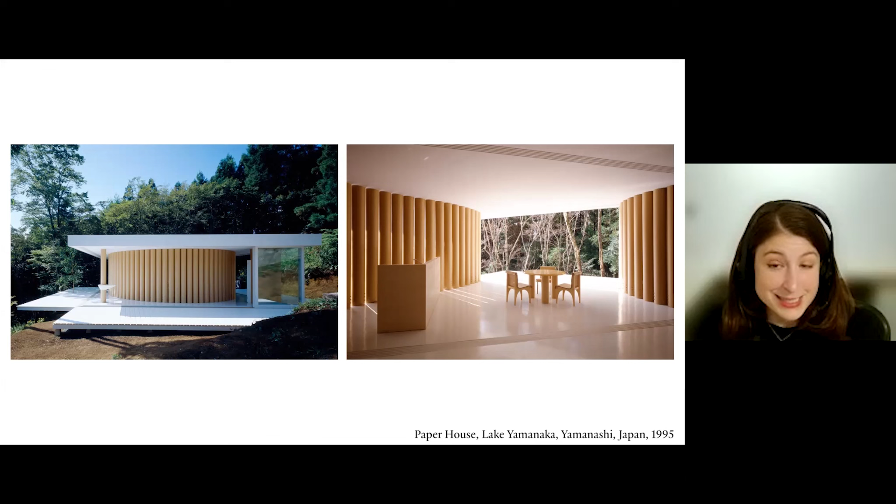A decade later, in 1995, Shigeru designed his weekend home, which is known as the Paper House. This is the first building in the world that was permitted to use paper tubes as primary structure. Shigeru often jokes with the office that he hasn't actually seen it since it was built because he's just too busy.

This might be more of the paper tube work that this audience is familiar with. Shigeru is very well known for his humanitarian work. So he uses paper tube structures to create disaster relief shelters around the world. These are 8 instances of the paper log house, which is adapted to the local climate, culture, and construction practices of each site.

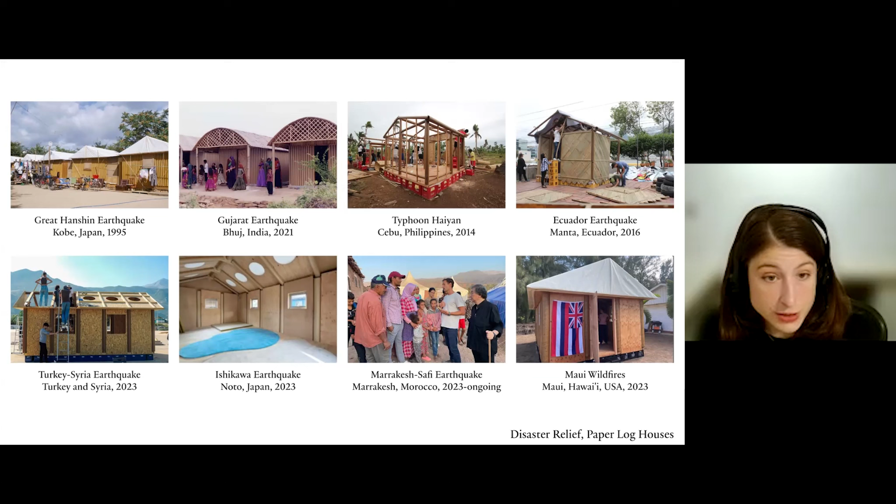Jumping ahead, this timeline displays Shigeru's progression from inventing with paper tubes at the outset of his career to the complex mass timber structures that we're familiar with today. But there isn't actually a distinct change from a paper era to a wood era because his timber innovation dates back to the 90s and continues in parallel with the paper works.

It's important to note that Shigeru's work is not limited to one material. We as an office are not timber purists, so we build with paper and wood, but also concrete and steel, often in combination. Regardless of the material, the breadth of our work demonstrates that structure and materiality are integral to the design process and not merely the means of executing a predetermined concept.

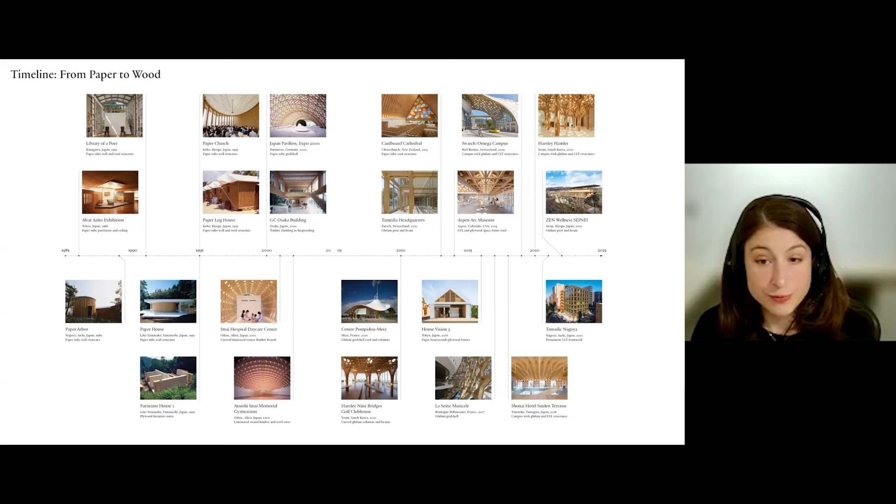Shigeru's work in paper is chronicled in the book on the left, Paper in Architecture, which was published in 2009. And in 2022, we published the compendium to this book, Timber in Architecture. This new book was created both to show the breadth of Shigeru's work in wood, but also to serve as a primer on how to design with wood.

Much like a building, a book is not a solitary endeavor. So I'd like to pause and acknowledge the global and interdisciplinary effort it took to make this book. We had contributions from across our Tokyo, New York, and Paris offices, as well as input from structural engineers, fabricators, and the editing and production team at Rizzoli. On behalf of myself and project editor Vittorio Lovato, I'd like to thank Shigeru Ban, Dean Maltz, and structural engineer Greg Kingsley for their immense input and guidance throughout this endeavor.

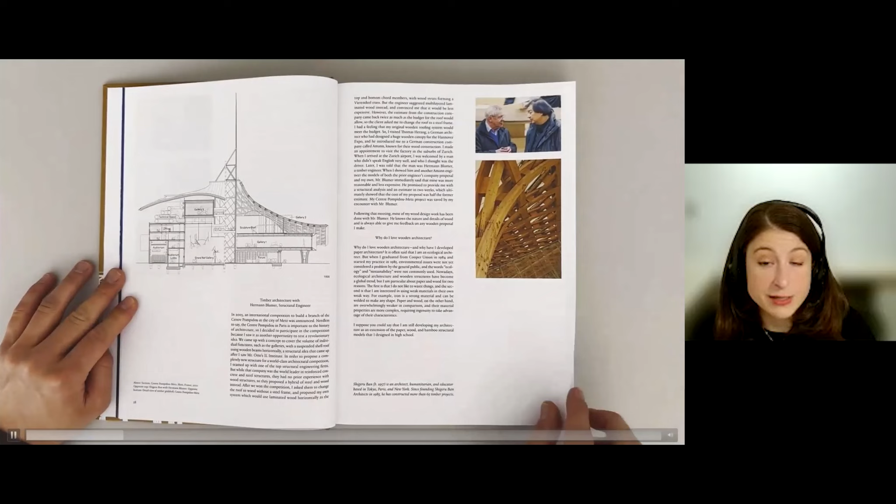So now let's take a look at the actual book. We begin with 3 guest essays to contextualize the importance of the subject of timber in architecture. There's a foreword by environmentalist and entrepreneur Paul Hawken, Shigeru's own essay, which is titled Why I Love Wooden Architecture, and Hermann Blumer's recounting of his career trajectory from carpenter to timber engineer.

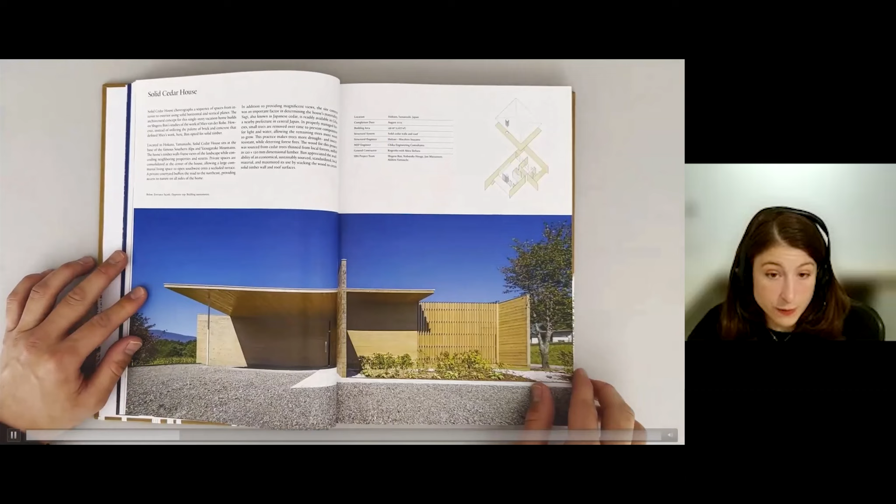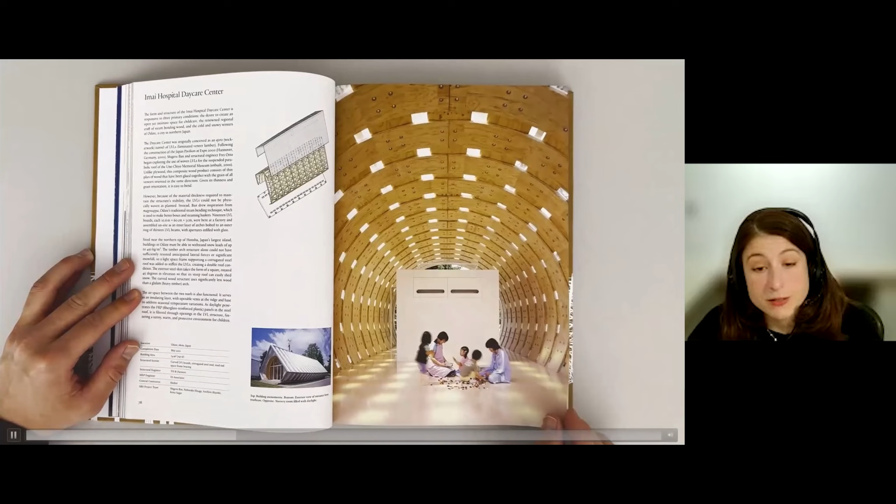The body of the book presents 45 works from concept through to the completion of construction, demonstrating the merits and challenges of working with wood. These projects range in scale, budget, and program, from prefabricated plywood houses to parametrically modeled glulam gridshells, showing the spectrum of what wood can do. Projects are arranged thematically rather than chronologically. So here you can see clusters by structural typology.

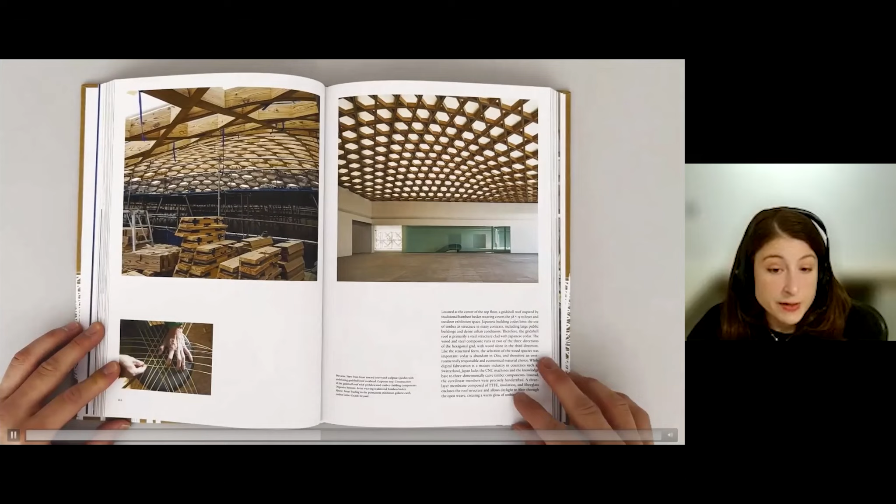Each project is illustrated through photographs, technical drawings, and documentation of the construction process. The subject of timber in architecture is inherently interdisciplinary, so throughout the book, you'll read about great collaborations among architects, engineers, fabricators, and builders.

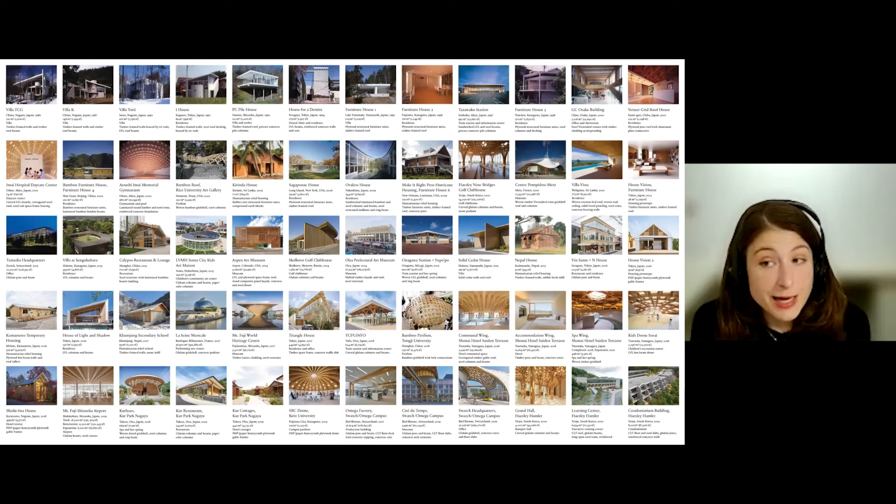The book concludes with an index of all of Shigeru Ban Architects' unbuilt, built, and in-progress timber projects. We have over 75 built timber projects around the world, from private houses to multi-building campuses. We'll be looking at just 10 of these tonight.

But first, we have to ask, why wood? This is a question that we've been asked nearly every time we've presented for the past decade, and it was the impetus for this book. Wood is a versatile natural material with diverse structural possibilities. It's sustainable and renewable and can often be locally sourced.

With offsite fabrication, timber construction sites are typically cleaner and safer, and construction schedules are often much shorter. You may be familiar with the term biophilia. Buildings with visible natural materials are noted for their positive psychological effects, promoting health, happiness, and even productivity.

Part of our tasks as architects is to continuously learn and educate. And so now more than ever, it's imperative that architects, builders, clients, and even the general public recognize how construction impacts the environment. Issues of waste, permanence, and material selection are crucial considerations in a holistically sustainable approach to design and construction. You've probably all heard the statistics. Buildings account for nearly 40% of the world's carbon emissions, with 11% due to construction alone.

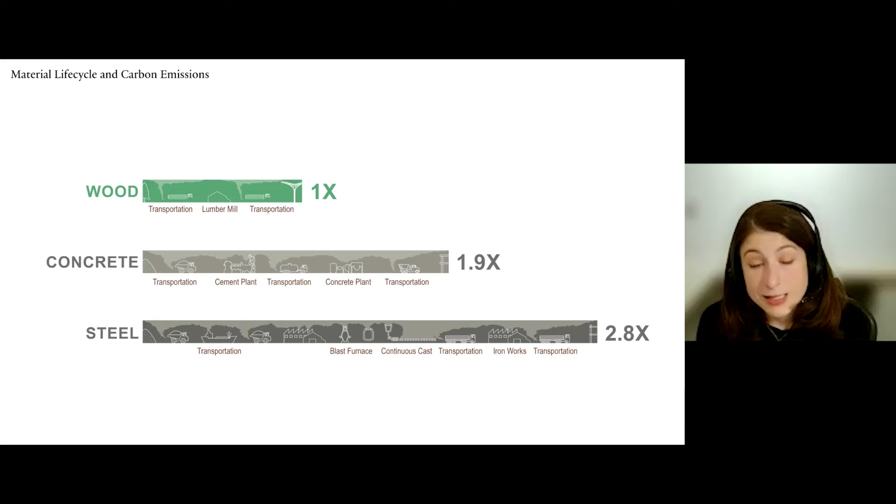But in terms of embodied carbon, wood far outperforms alternative structural materials such as steel and concrete. And this is a large reason why we advocate for timber. But it's reasonable to understand concerns. First, what about deforestation? Contrary to popular misconceptions, the use of sustainably sourced wood from small diameter trees promotes the health of forests and makes them more resilient and fire tolerant. Next, isn't it expensive? Many people think only about the unit cost of a material, but reductions in on-site labor and construction duration often yield considerable savings for timber projects.

Coincidentally, the oldest timber structure in the world is in Japan. This is the Horyuji Temple, which is more than 1,300 years old. It still stands today in part due to its strong and durable materials, robust structure, precise detailing and construction, and also because it's of great cultural significance. As Shigeru often notes, if a building is loved, it becomes permanent, and this concept transcends materiality. Buildings that are meaningful to their communities are cared for, and that's truly the most environmentally responsible approach to create architecture that endures for generations.

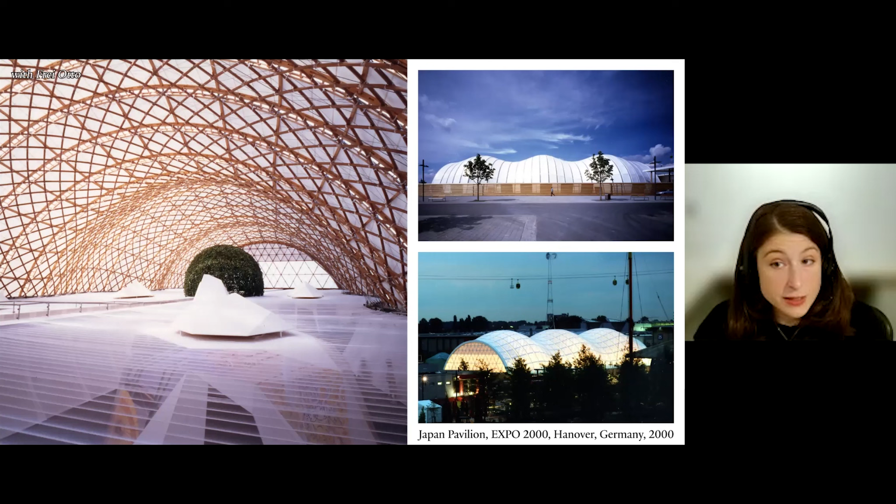To do this, we need to collaborate. From the outset, we engage a team of structural engineers, fabricators, and builders, seeing real-world constraints as opportunities for innovation. Shigeru has great respect for his collaborators, and his introductory essay in the book is dedicated to his close working relationship with these three renowned structural engineers. Gengo Matsui helped Shigeru's early paper tube concepts come to fruition, advancing beyond simple upright columns. With Frei Otto, Shigeru delved into form finding. So here you can see the influence of Otto's Mannheim multi-hall on Shigeru's paper tube Japan Pavilion in Hanover.

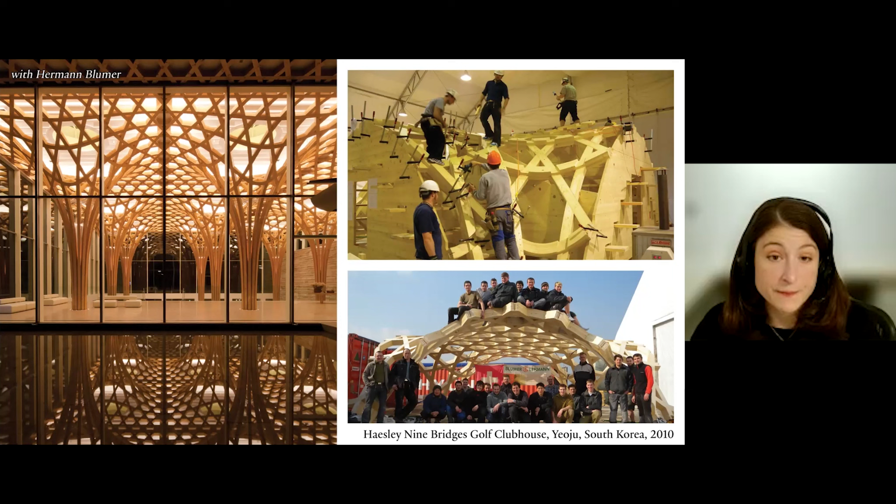And lastly, we have Hermann Blumer, who also wrote an essay for the book. He began his career as a carpenter before pursuing a PhD in structural engineering in 1969. His focus on wood was actually looked down on at the time, since his colleagues didn't think wood was a complex enough subject. But Hermann persisted, and he became a pioneer of digital fabrication. He later designed the first fully automated CNC machine. You can see the breadth of his understanding of structure, materiality, and craft here in the Nine Bridges Golf Clubhouse.

Next, we'll begin a deep dive into a selection of projects, beginning with the first project in our book, Furniture House 1. Sometimes the topic of local materials is less related to regional wood species and more a matter of what building materials are locally available. The first in an ongoing series, Furniture House 1 uses prefabricated plywood furniture units as the primary building structure. This residence is located on a remote wooded hillside, which posed construction challenges regarding site access.

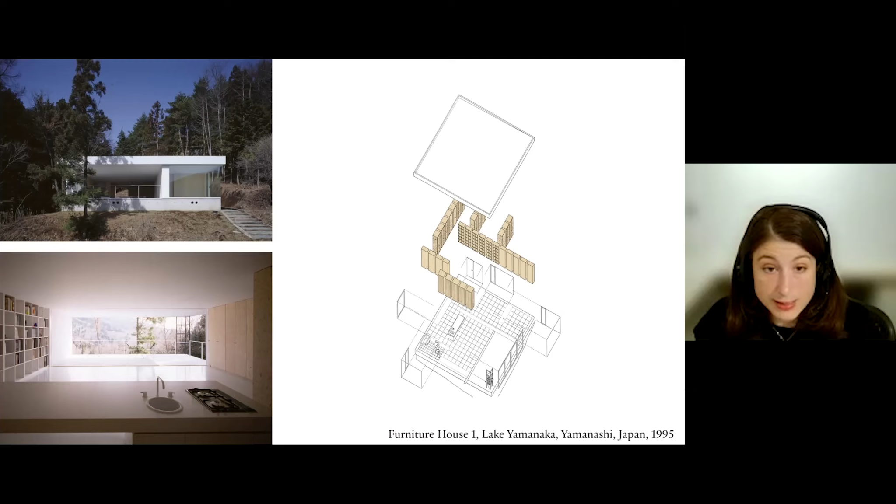Standardized furniture units allowed for off-site construction, which reduced construction time, material waste, and the need for on-site labor. This yielded both cost savings and a higher quality building. The 33 prefabricated furniture units included closets, cabinets, and bookshelves. Each weighs approximately 175 pounds and could easily be maneuvered into place by just 2 people.

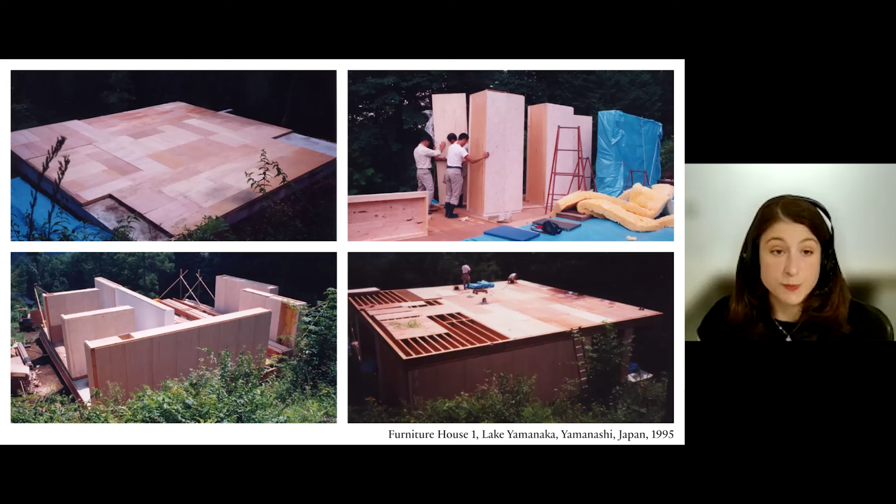The Bamboo Furniture House is the 4th house in this series. This one-story residence draws on traditional Chinese architecture, with rooms arranged around a central courtyard. Here again, Shigeru used furniture units, but as the name suggests, he selected a geographically and culturally appropriate material for their construction. Shigeru had found that local lumber options were limited near this mountainous site, but he was intrigued by plywood-like boards that he found that were made of laminated woven bamboo strips.

He thought that this could be manufactured as a building-grade material, so he began to pursue rigorous testing with assistance from a bamboo factory. His newly developed material, which he deemed laminated bamboo lumber, or LBL, was used throughout this home for both bamboo furniture units, furnishings, and finishes throughout. This project epitomizes how Shigeru explores new and creative ways to address design constraints with local, natural materials.

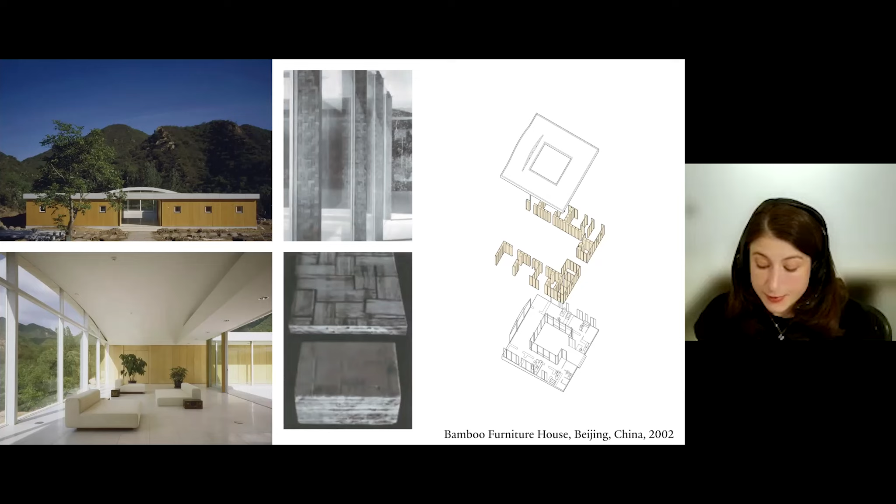Increasing in scale, let's discuss what we do when code prohibits mass timber structures. Ironically, Shigeru has found that Japan has some of the most restrictive building codes in the world. In most urban conditions there, it is not possible to build in mass timber. The misconception in this case is that mass timber buildings are not safe, but in actuality, building code has not caught up to the realities demonstrated by rigorous testing. In the US, we're lucky to see code changes quite regularly.

Shigeru grappled with this over 2 decades ago when he was commissioned to design a new office and showroom for a dental company. Since a timber structure was not allowed, he opted to work with steel for its strength and ability to span long distances. Steel requires a fireproofing layer, known as encapsulation, to prevent structural damage in case of fire. This is typically clad with a finish-grade material to improve its appearance.

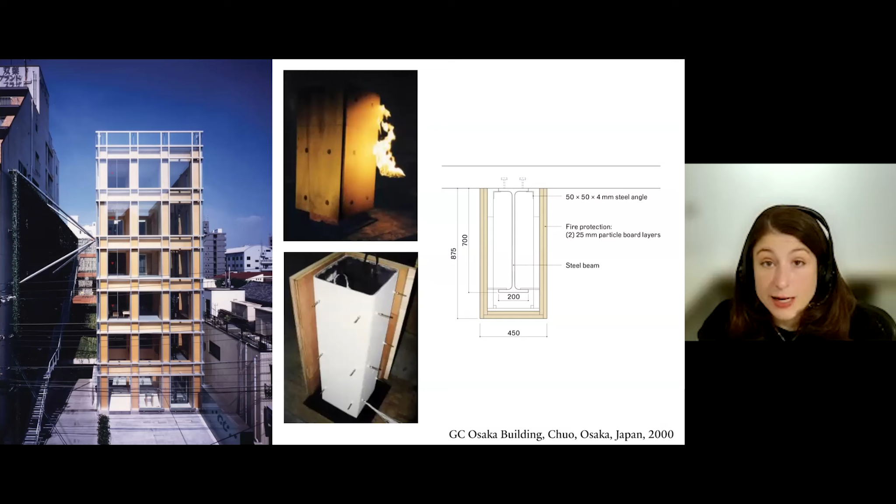Subverting the logic, Shigeru demonstrated to officials that wood could in fact be used to fireproof steel. Fire resistance tests demonstrated that 50 millimeters, or about 2 inches of wood, adequately addressed the building's 1-hour fire rating requirement. Therefore, 2 layers of particle board with a plywood finish were used to encapsulate the steel. So despite not being a timber structure, the building retains the warm aesthetic of wood.

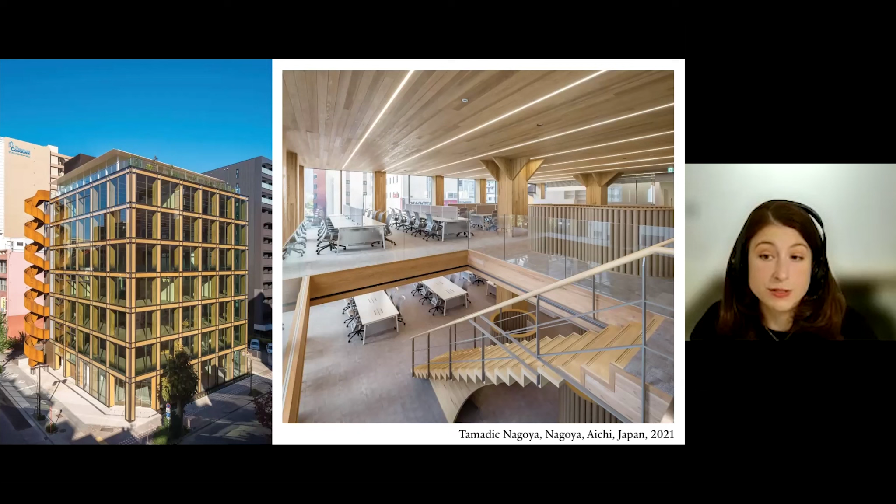Tamadic Nagoya is a more recent example. This aerospace and automotive engineering company wanted an innovative building that would take advantage of biophilia. And as I mentioned earlier, timber environments have been shown to improve employees' sense of health and well-being and even productivity. This 8-story building is also located in a Japanese city. So to satisfy the building code while retaining the warm aesthetic of wood, a hybrid approach was used here.

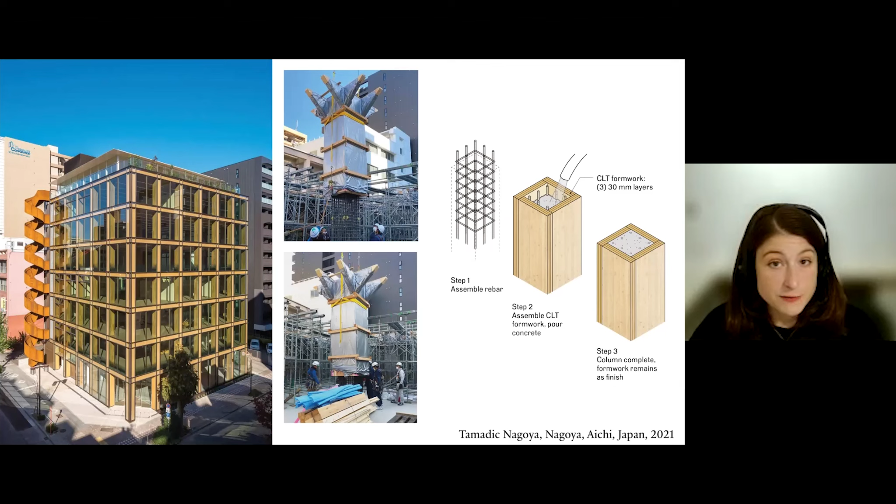Tamadic Nagoya employs CLT, which is cross-laminated timber, as the permanent formwork for the concrete floor slabs as well as the concrete column structure. On the right, you can see that a box was made of wood, filled with concrete, and then the wood was left in place. The use of permanent formwork has many benefits, most notably the biophilic benefits of wood, a shortened construction schedule, reduced carbon footprint by eliminating sacrificial formwork, and lastly, not needing additional finish layers because the wood serves as a finish.

Increasing in scale, let's talk about mass timber itself. So in contrast to solid wood, mass timber is an engineered wood product that's composed of lumber from small diameter trees that's bound together by adhesives, nails, or dowels to create larger structural members. This has two primary advantages. First, it doesn't require the use of old growth trees. And second, mass timber is inherently stronger than comparably sized wood. Because it's a composite, mass timber is a standardized product with predictable strength characteristics.

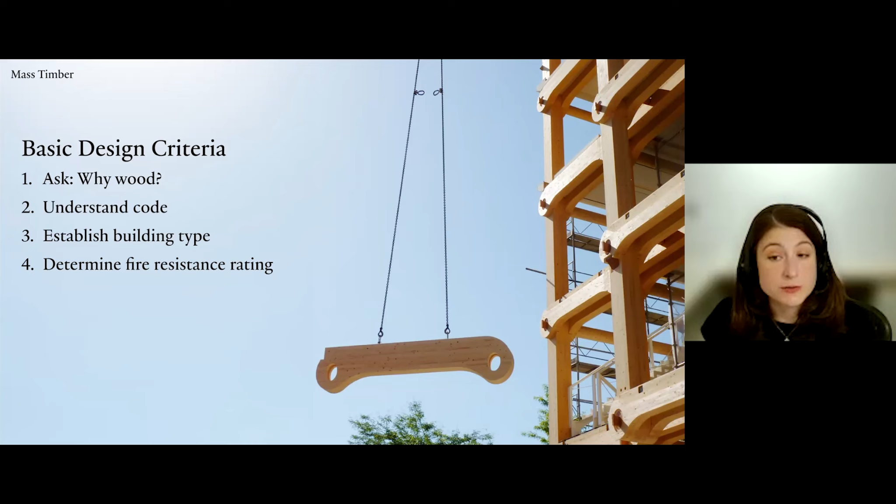So first we have to stop and ask, why wood? Is it even the right material for the job? Oftentimes, a hybrid solution is the best approach. Next, we review the code to understand what you can do in a given jurisdiction and establish the building type and fire rating. From here, we can establish the structural grid, considering spans and member sizing in relation to vibration and deflection. Once the grid is established, we consider the MEP strategy. Do building systems bypass the structure or pass right through it? And lastly, how do we optimize the volume of wood to both minimize material waste and erection time?

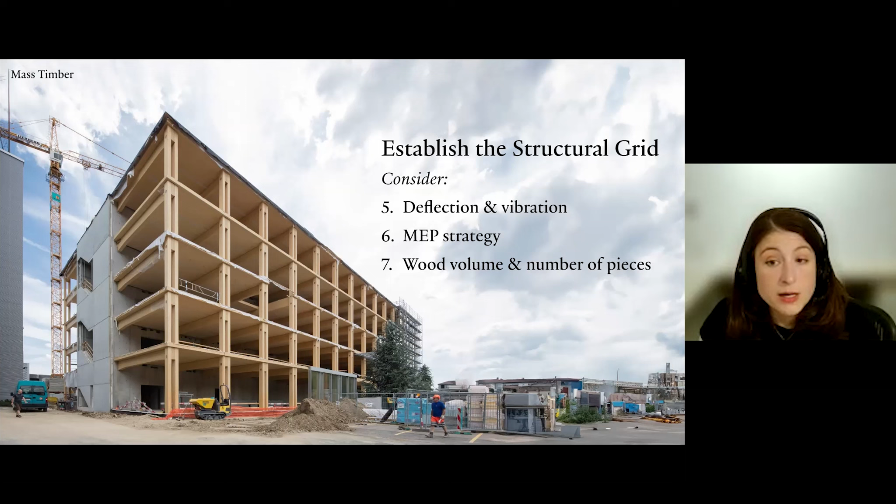Now we can think ahead to constructability. Ideally, you want to meet with a potential mass timber supplier and fabricator at the outset of your project to allow them to influence the design process. So you can stop and think, what species of wood will you use? Is it native? In the US, in the Pacific Northwest, you might be thinking of a spruce pine fir, but in the South, perhaps southern yellow pine.

You'll consider also the manufacturers' and fabricators' geographic proximity to each other, as well as your site. As you consider connections and tolerances, think about your partner's fabrication equipment and how the design will come together. With all of this in mind, you can allow your partner's capabilities and limitations to inform the design process. You simply can't fabricate projects in the same way in New York as Switzerland, for example, but you could leverage these differences to find opportunities.

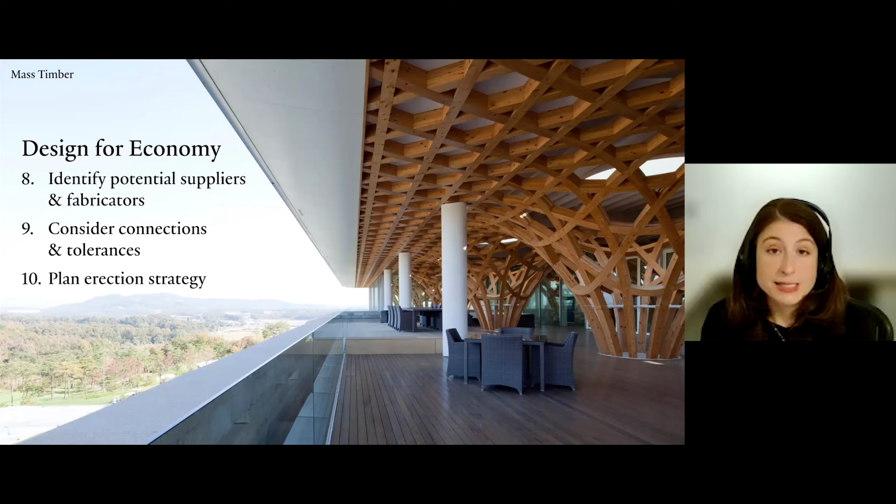Lastly, begin to outline the erection strategy. This is something that we often do in schematic design at Shigeru Ban Architects. So from how many truckloads it takes to how you'll stage the site, this impacts both cost and schedule. We'll spend the remainder of the presentation looking at three structural typologies. First, post and beam structures, then space frames, and lastly, grid shells.

Switzerland is a global leader in timber construction. The Tamedia headquarters is our office's first building in that country, and also the home of our friend Hermann Blumer, who is the structural engineer for this project. Tamedia is the largest media company in Switzerland, and they've occupied the same riverfront site in Zurich since 1902.

With this new project, the client had three primary goals. First, to create a workplace that feels like a living room. Next, to make the building feel transparent, both literally and metaphorically as a media company. And lastly, to maintain a reasonable budget. In response, Shigeru designed a timber post and beam structure wrapped in a glass curtain wall.

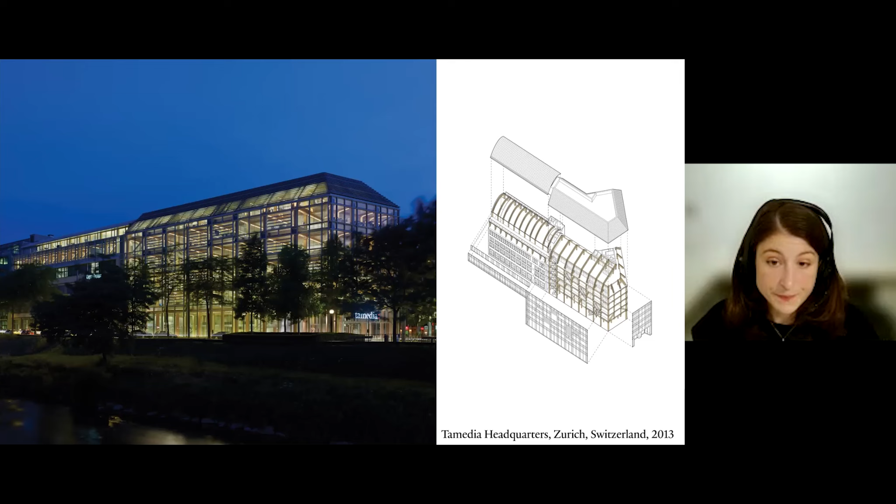Switzerland has high energy performance requirements, so sustainability was a key factor. For example, there's an occupiable double facade, which you can see in the image on the right, and this acts as a thermal buffer while allowing for natural ventilation. Here you can see the retractable glass shutter is raised, creating a pleasant indoor-outdoor balcony.

The robust columns and beams arrived on site like a kit of parts. Remarkably, each column was delivered as a single continuous piece, measuring 70 feet in length and weighing 2.5 tons each. This significantly reduced the construction time, which was a major advantage on a hectic urban site.

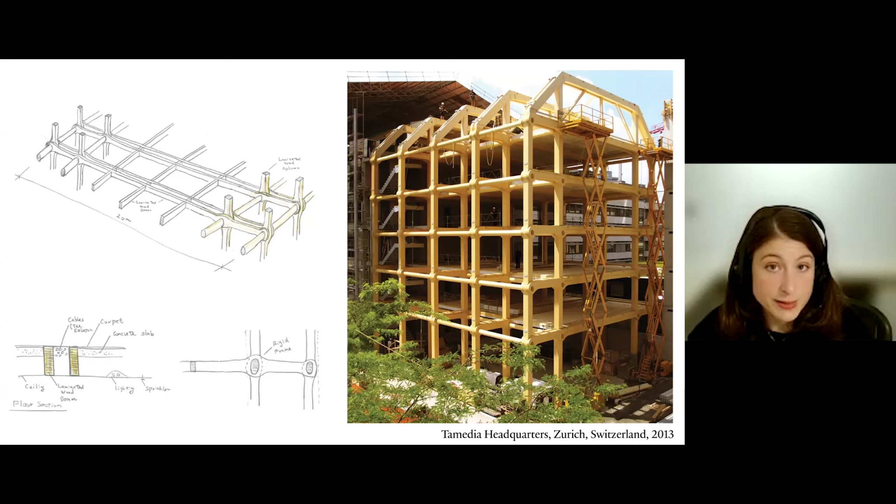The glulam columns and beams interlock at innovative joints, which are secured by an elliptical dowel without any metal connections. The form is both functional and elegant. The elliptical shape prevents rotation within the aperture. Hermann Blumer identified that the stresses were too large for spruce beams alone. Spruce is a softwood.

So Hermann suggested the inclusion of concealed reinforcement plates made of beech, which is a hardwood. In the diagram and construction photo, you can see that the beech is the darker material. The design and engineering of this joint is one of many great examples of the collaboration between Shigeru and Hermann.

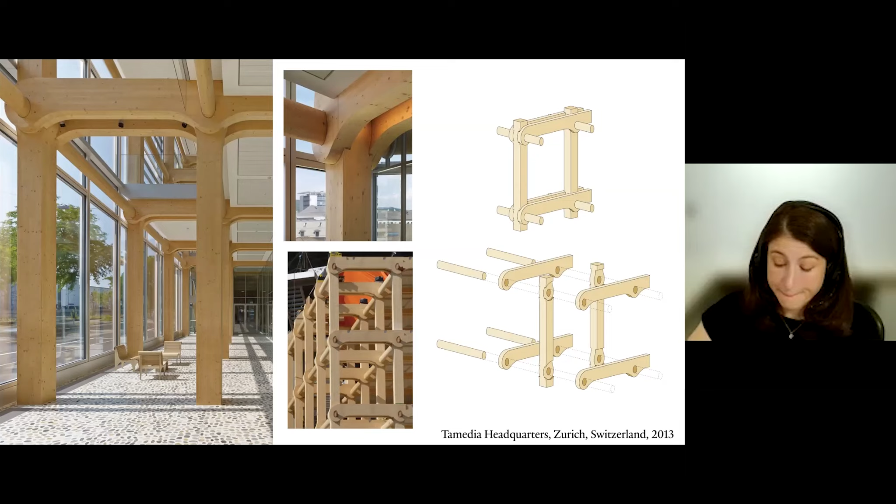Now we'll look at space frames, which are akin to 3D trusses. This is the Aspen Art Museum, which recently celebrated its 10th anniversary. The Aspen Art Museum was designed to be a unique yet contextual building, so its woven wood and paper composite facade is evocative of the color and rhythm of Aspen's historic brick buildings. The porous screen facilitates views into the museum as well as out towards the mountains.

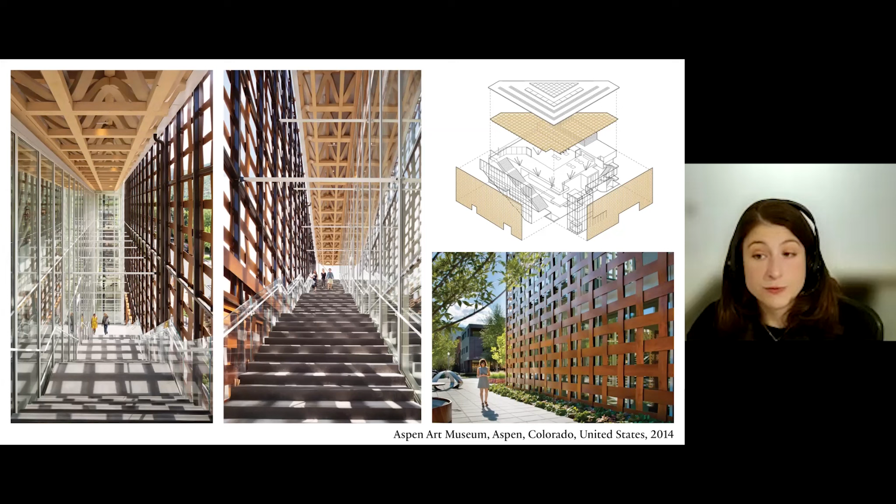Here you can see two views of the Grand Stair, which is an indoor-outdoor interstitial space behind the woven screen. Similar to the experience of skiing, the museum was designed to be circulated from the top down. Visitors first ascend via the Grand Stair or a glass elevator, and then arrive at the rooftop plaza before descending to the galleries below.

Shigeru believes that the natural context is as beautiful as the art, so it was important to highlight the stunning views of nature with the only free public rooftop in Aspen. The timber space frame structure extends from the outdoor rooftop plaza to an indoor cafe.

Below, the building interior is arranged according to what we call the thermos principle. Climate-sensitive galleries are concentrated at the heart of the building and are surrounded by less climate-sensitive spaces such as lobbies, hallways, elevators, and offices. This minimizes the temperature and humidity fluctuations in the galleries and allows the perimeter zones to take advantage of visual and physical connections to the outdoors.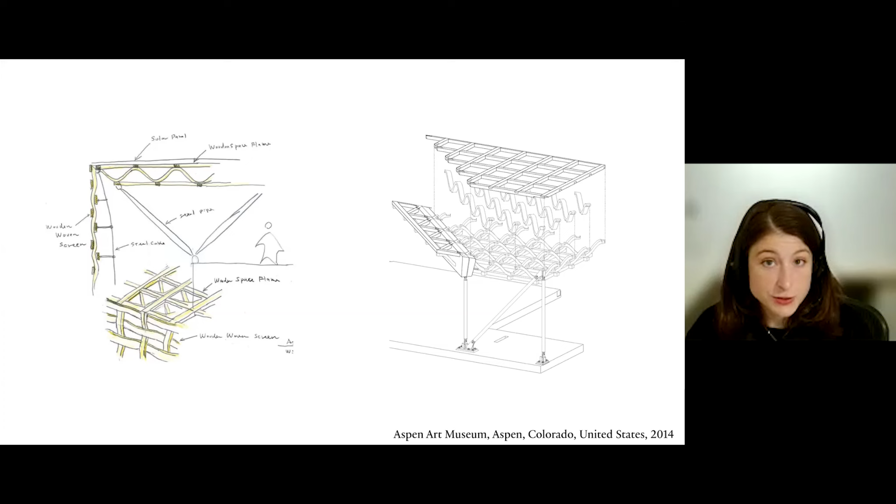For those familiar with space frames, you may notice that the roof structure is not a typical space frame. The webs are curved, which allows for sufficient wood-to-wood contact so that the webs can be connected directly to the chords with just diagonally oriented wood screws. As a result, there are no exposed metal connections. The structure was developed in conjunction with Hermann Blumer of Création Holz, Greg Kingsley of KL&A, and fabricator-erector Spearhead.

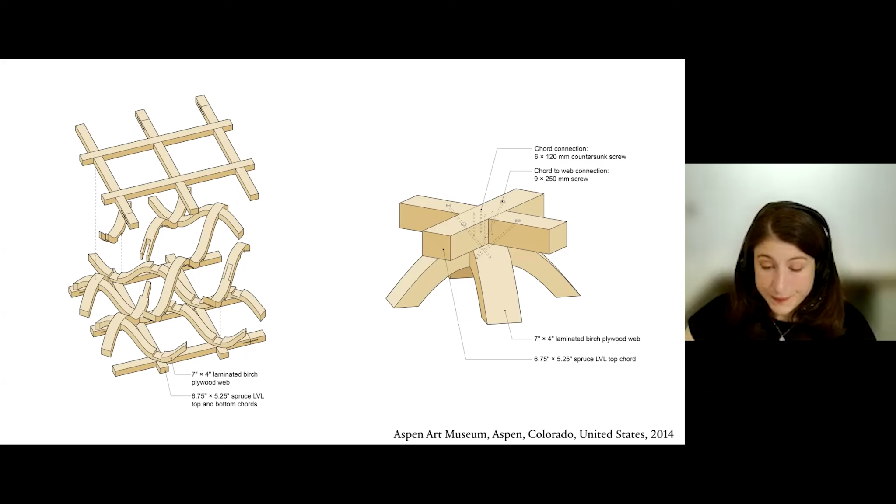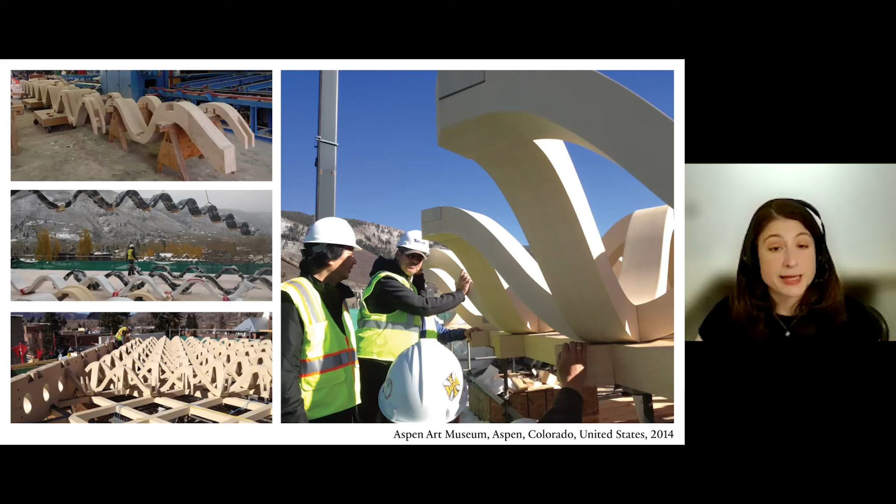Here in the upper left, you can see the 2D webs in Spearhead's shop. The timber components were fabricated and shipped to the site in the longest possible transportable lengths, which ultimately minimized on-site labor and construction duration.

Now moving on to gridshells. The Centre Pompidou Metz is perhaps Shigeru's most iconic building and one of the most well-known mass timber structures in the world. And though it's hard for us to imagine today, the client initially suggested switching to a steel structure. In 2003, the Centre Pompidou hosted a competition to design a new museum outside of Paris. The intent was to show more of their 120,000 works from their collections, as well as larger works that wouldn't fit in the Centre Pompidou's 18-foot ceilings. Given the architectural significance of the original museum, Shigeru saw the opportunity to build an unprecedented structure.

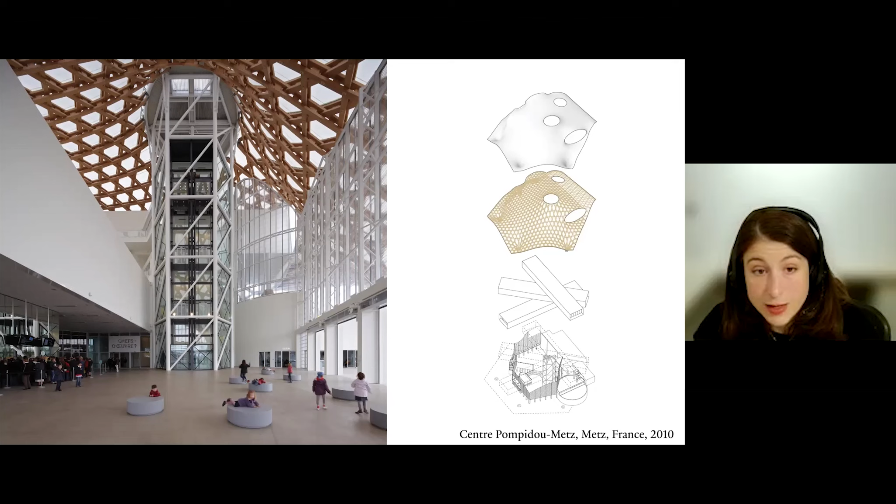The museum was designed as an open pavilion in a park. Unlike its peer institutions, the Centre Pompidou Metz is not a walled-off institution. Here you can see the 16-foot tall glass shutters retract to connect the building to the surrounding landscape and park. The building consists of a timber grid shell suspended from a 250-foot tall steel core tower. Despite its sculptural image, the roof defines a simple hexagon in plan, which is symbolic of the shape of France. 3 gallery tubes below are oriented towards local landmarks.

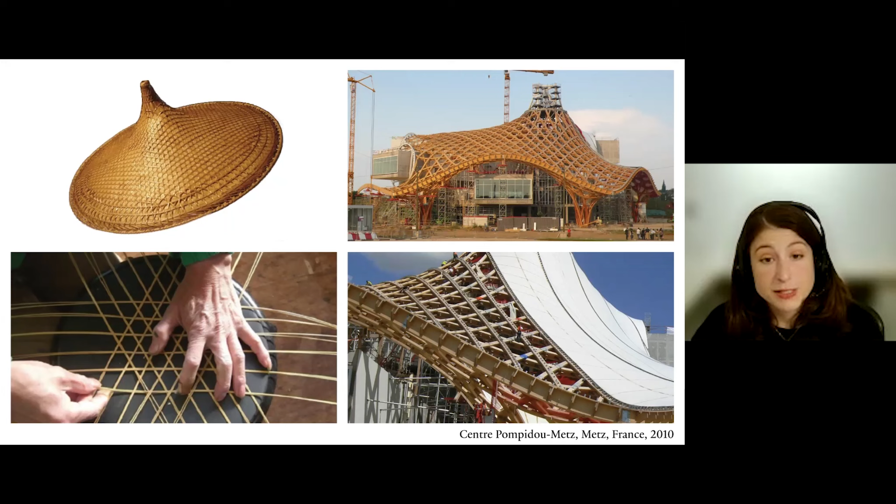So here in the upper right, you can see one of the gallery tubes, which is 300 feet long, is oriented towards the 16th century Gothic Cathedral of Metz. For the iconic roof, Shigeru drew inspiration from 2 seemingly unrelated sources. The first, cable net roofs designed by Frei Otto, which have a separate cable structure and wood enclosure. And the second, the self-supported woven structure of traditional Chinese hats, which made Shigeru question the necessity of cable net structures.

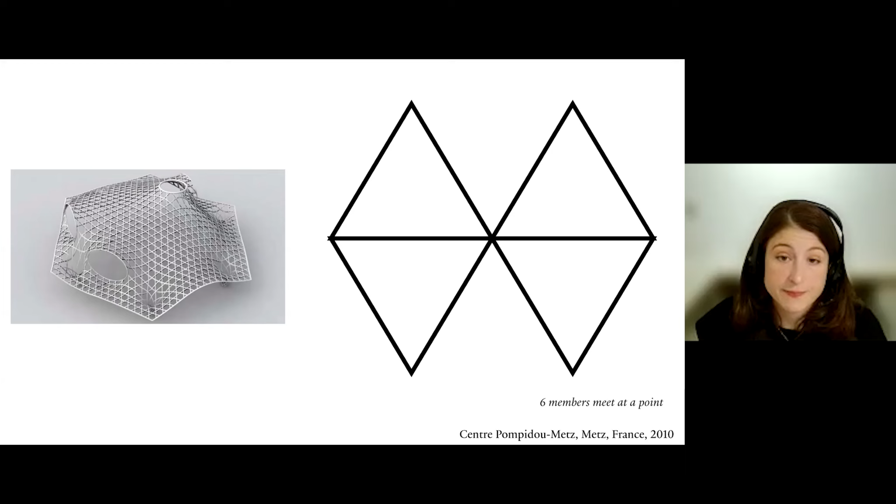In a typical triangulated joint, you'd have 6 members intersecting at a point. This yields a very complex and expensive joint. But here instead, you can see the influence of the woven Chinese hat. By offsetting the grid, only 4 members meet at a single point. This is the ingenuity of Metz.

The story of this building's structural resolution is really quite fantastic. After the initial team of engineers proposed a hybrid structure followed by a solid wood structure that was twice the roof's budget, the client asked Shigeru to change the roof to steel. But Shigeru wasn't deterred, so he went to Germany to consult timber engineers and builders. At the airport, he was greeted by a Swiss man who he thought was a taxi driver, but it was in fact Hermann Blumer.

The 2 sides of this story are beautifully recounted in the 2 introductory essays of the book. Shigeru described his conundrum, and Hermann cheerfully responded that he would have a solution and a cost estimate within 2 weeks. Truthfully, he had no idea. Then, and every time since, when Shigeru gives him a complex problem, Hermann goes off to the Swiss mountains to think and always comes up with a brilliant solution.

Independently, Shigeru and Hermann each realized that they should not only simplify the grid in 2 dimensions, they also had to offset the depth of converging members so that they would bypass one another at nodes rather than intersecting. They could then be connected by a simple pin. In this configuration, each beam is a simple Vierendeel truss. Similar to Tamedia, the beams are made of spruce, a softwood, and connections are made of beech, a hardwood, which takes on the high stresses of the joint.

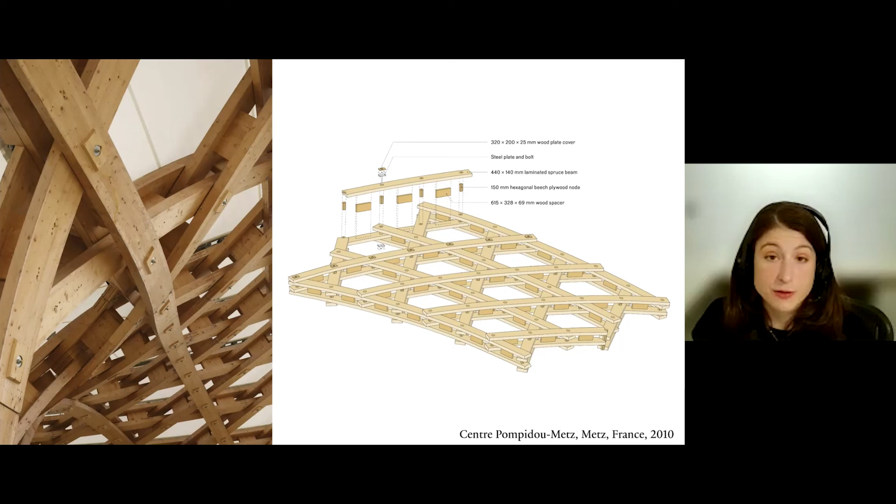The buildings share a design language reflecting the unified brands of Swatch and Omega, while expressing each building's individuality through contrasting structural forms. We'll take a quick look at the 2 rectilinear buildings, but focus on the grid shell. The Omega factory was built first. The Omega brand is known as the timekeeper for NASA as well as the Olympics, so it was only fitting to have a clean rectilinear form that reflects exacting Swiss standards.

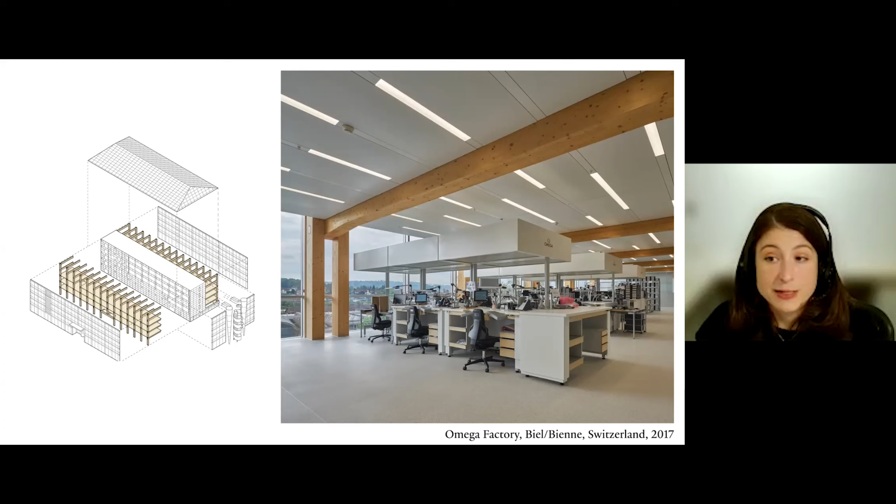The building is a post and beam structure with a rigid concrete core, flanked by timber-framed watchmaking workshops. Working conditions were a primary factor in the building's design. Most notably, literal cleanliness is highly important here. The Omega factory is the first building in the world to achieve clean room standards. This certification is important for the sake of craftsmanship as well as employee health. The workspace must be evenly lit and dust-free with minimal vibrations. Since mass timber is known to vibrate, a concrete topping slab was added to increase the weight of the CLT structure.

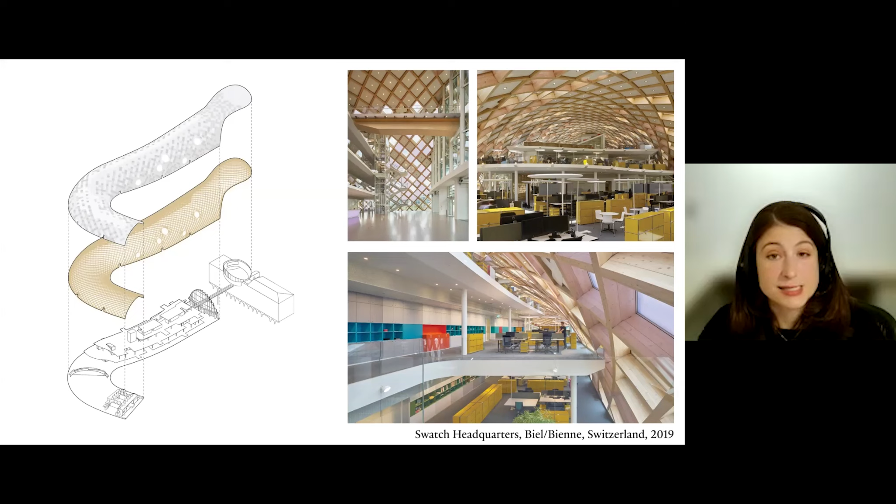In contrast to the maturity of Omega, the Swatch brand is playful, innovative, and provocative. Though the serpentine form and facade design appear unrestrained, each is responsive to a practical design constraint, ranging from code and zoning setbacks to material properties and building services. The structural grid shell covers 4 office floors, connected via 3 concrete cores. The timber structure is composed of a 7-foot grid of interlocking timber beams that seamlessly transition from wall to roof structure, and the office space below is open and flexible, fostering collaboration.

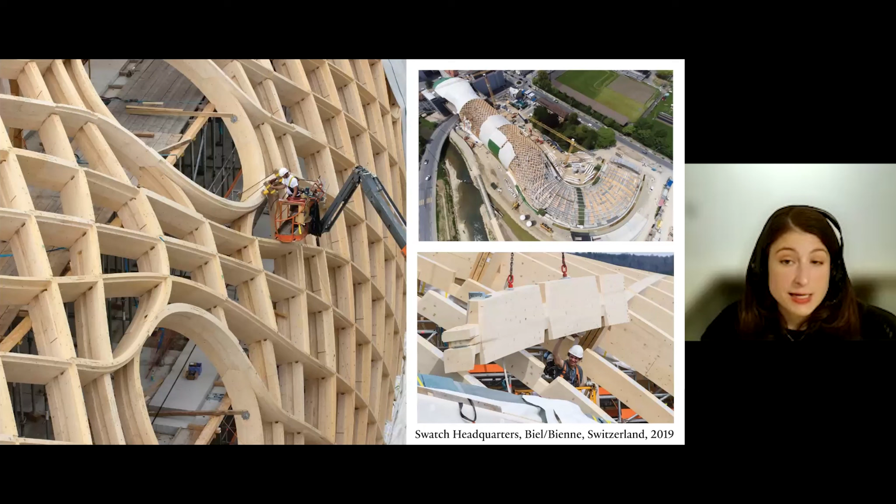The Swatch headquarters was designed in a truly contemporary manner without traditional construction documents. Instead, a parametric digital model accounted for the specification of all 7,700 timber components with a precision of 0.1 millimeters. This allowed the wood to fit together perfectly on site like puzzle pieces. In a more typical building project, you might expect errors to impact up to 15% of the parts delivered to the site. But this complex grid shell had only a 0.11% error rate, meaning that only 72 of the 62,792 prefabricated roof elements had an error.

This is a testament to the truly interdisciplinary and collaborative nature of the design process. SBA worked extensively with structural engineer Hermann Blumer and his firm Création Holz, as well as digital facilitators Design to Production, who created the digital fabrication model and resolved conflicts that could have arisen in the integration of building services. This dynamic team has worked together for nearly 2 decades, beginning with the Centre Pompidou Metz.

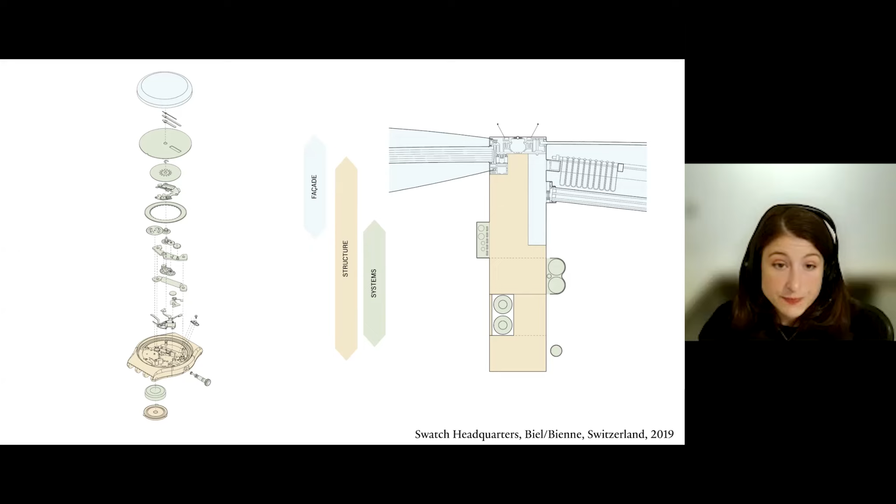The building envelope integrates structure, building services, and the facade. Here you can see structure in yellow, services in green, and the facade in blue. Since the maximum footprint of the building was fixed due to site constraints, an unnecessarily thick envelope would have reduced the building's usable floor area. To resolve this, Shigeru drew inspiration from the original Swatch watch, which integrated components directly into a manufactured plastic case. This reduced both the cost and the thickness of the watch. Shigeru's approach was similar. Instead of discrete layers of structure, building services, and facade, he integrated the 3. The facade nests into the structure, and the building services pass through it.

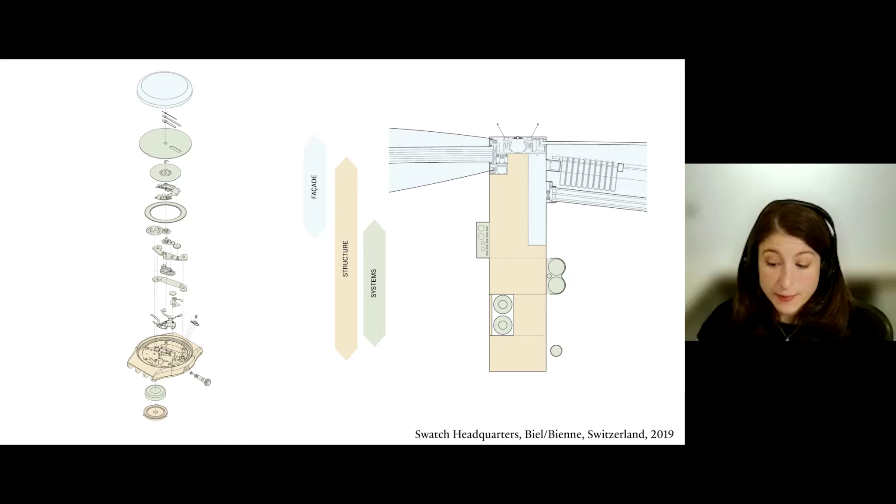Prefabricated openings were tailor-made to the size of electrical cables, sprinkler pipes, and cooling pipes, with cutouts staggered and mindful of the wood grain so that the structure would not be weakened. The 120,000 square foot roof surface has 2,800 apertures arranged in a spirited pattern. ETFE cushions, which are white and pillow-like, are employed for diffuse daylighting, which helps to create a glare-free environment for the office. CLT panels at the high points of the roof reduce the solar heat gain. PV panels on the top and south side of the building offset the building's energy consumption. And the Swiss cross form acts as structural bracing and acoustical absorption. At the lower levels, glazed panels provide views of the neighboring park.

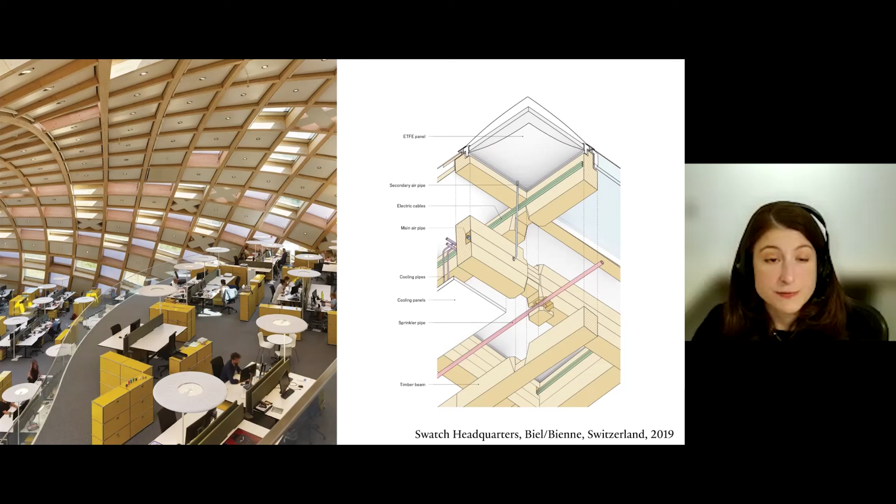The Swatch gridshell reaches over the festival street and sits atop Cité du Temps. This museum and conference center acts as the interface between the 2 brands. So you can see that the museum incorporates the architectural language of its 2 neighboring buildings, with playful concrete arches at the base, a rectilinear timber structure for the 2nd through 5th floors, and a mansard roof evocative of the campus's historic buildings.

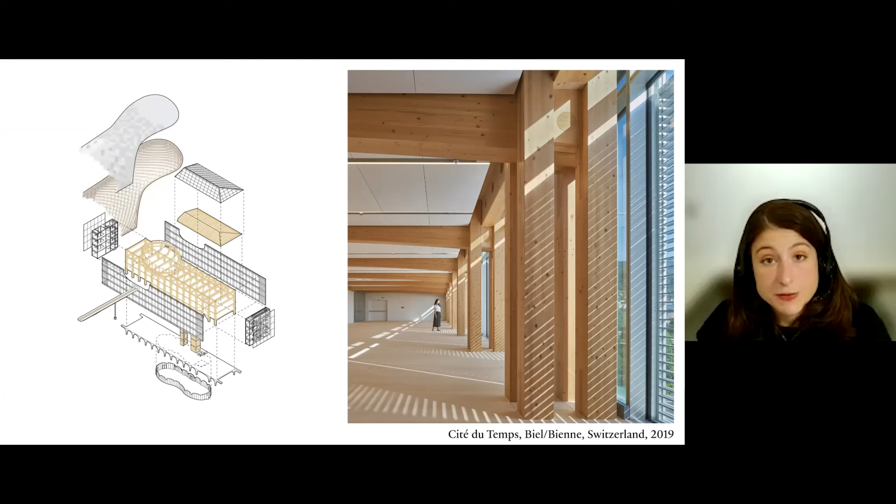The Omega factory has a concrete core and topping slab, but Cité du Temps is an entirely timber structure above the ground floor, with glulam columns and beams and CLT floor slabs and core panels. This is an outwardly simple building, but its complex interfaces required great attention to detail. Not only are there timber and concrete structural systems, but the building literally intersects with neighboring buildings on both sides.

Despite being such an enormous project, collectively, these 3 buildings were constructed from 160,000 cubic feet of certified Swiss timber. Considering the growth rate of Swiss forests, it would only take 10 hours to regrow this quantity of wood domestically. That's 0.1% of Switzerland's annual timber production.

Now we'll take a look at one of our current projects from the New York office. Kentucky Owl Park is a 500,000 square foot distillery in Bardstown, Kentucky, sited in a 420-acre reclaimed limestone quarry. The distillery is on a peninsula at the center of the site, surrounded by production buildings, including a bottling center, craft cooperage, rick houses, as well as visitor center and train station.

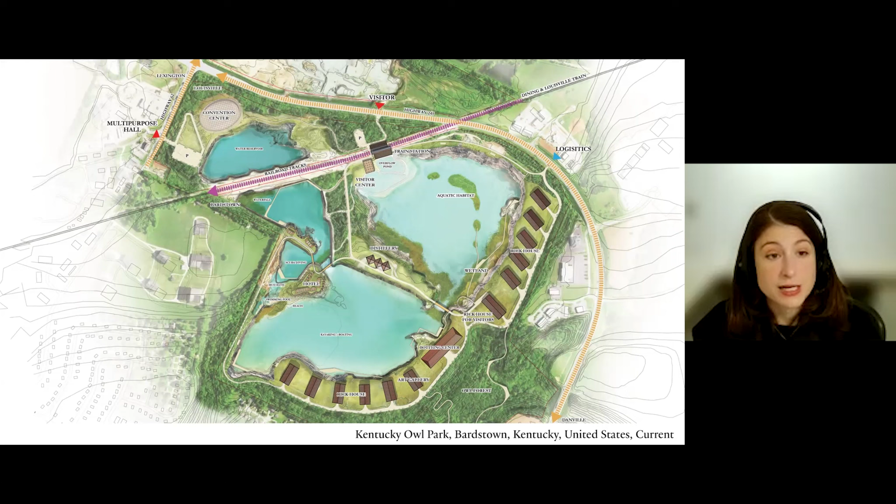Here you can see 3 pyramids of the distillery. The adjacent lake water will be used to make the bourbon. In the first pyramid, visitors gather for tours and are educated about the bourbon making process. The second pyramid, which is shown at the right, is where distillation takes place. The shape of the pyramid actually comes from Shigeru's pragmatic idea to efficiently accommodate the 60-foot tall column stills at the center of the building while minimizing the overall volume of the building.

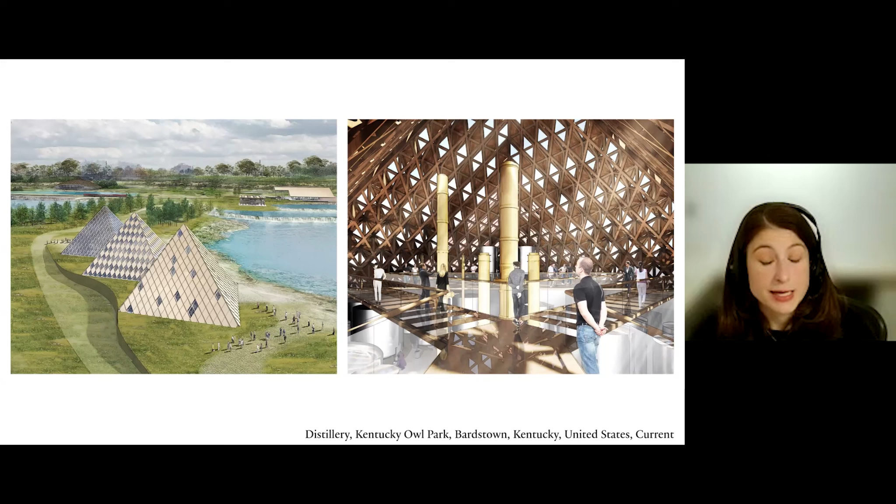And in the last pyramid, the bourbon is placed into barrels in preparation for aging. The roof structure here may appear familiar. It's actually an evolution of the Aspen Art Museum's wooden space frame. In the visitor center, we drew inspiration from the structure of a bourbon barrel. The dendriform columns are a combination of timber and steel, which is evocative of wood staves and steel hoops from a bourbon barrel. We'll conclude with an animation of the project.

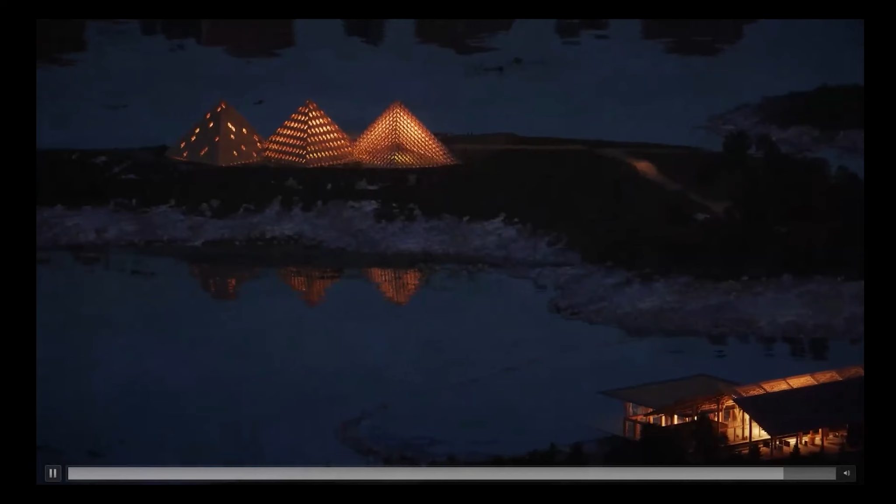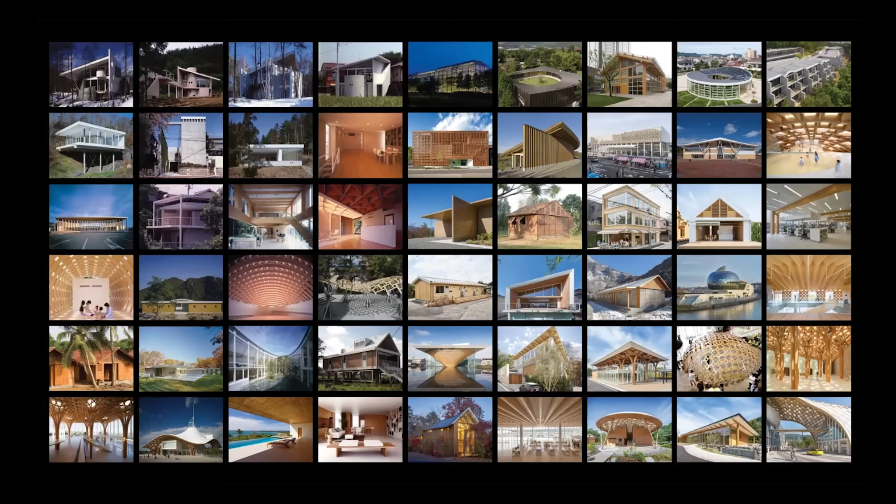I appear to have lost my video for the end here, but just to conclude, we're looking forward to adding Kentucky Owl Park to our grid of completed projects. We can learn so much from discussing the trajectory of a project from concept through to the completion of construction. And so this evening, we only took a look at 1/4 of the projects detailed in Timber in Architecture, skipping over structural typologies such as arches, domes, and tree columns due to time. Prior to the publication of this book, Shigeru Ban was the only person who knew all of these details.

So I hope that you understood a few key points. I hope these points resonated in this talk. First, that across the spectrum, from simple plywood houses to complex grid shells, wood presents a great breadth of possibilities in the face of constraints. And second, appropriate material selection and application is a critical factor in our efforts to build responsibly and reduce carbon emissions. That doesn't mean that wood is always the answer or that more wood is inherently better.

And lastly, this is a highly collaborative field. Architects don't work in isolation, and the relationships we build with engineers, fabricators, and builders carry on from one project to the next, evolving a collective body of work. This book was also a collaboration, and the best way to advance the discipline of mass timber is to share our respective knowledge and experience.